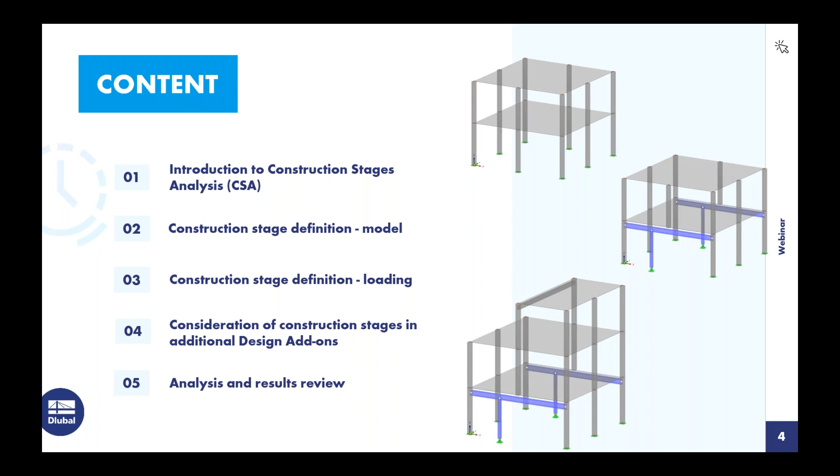So we might be wondering, why would we want to consider stage construction? Well, we know during the construction process that the structure may actually pass through several loading conditions that vary from the completed structure. For example, when we're talking about multi-level story buildings and adding each additional level on top of each other, the previous level is already undergoing deflections and stresses. If we look at the building on the right-hand side, we set up our formwork for the first level, we let the concrete cure, we remove the formwork, and we move on to the second level. That first level is already undergoing some of these deflection stresses from self-weight alone, or maybe some of those additional construction loads. So we'd like to take those into account with stage construction.

Regular simple structures may see very little difference when we compare the stage construction to simply applying the loads to the finished structure. However, when we're talking about multi-story buildings or structures with vertical irregularities, such as interrupted columns or walls, we might actually see a significant result difference between the finished structure versus taking into account each construction stage. The construction stage analysis add-on within RFEM allows us to compare similar structures under different modeling or loading scenarios in a single file, and we also can include nonlinearities with these comparisons. So rather than creating multiple files with the first level completed, then the first level and second level completed, we can consider all of that in a single model.

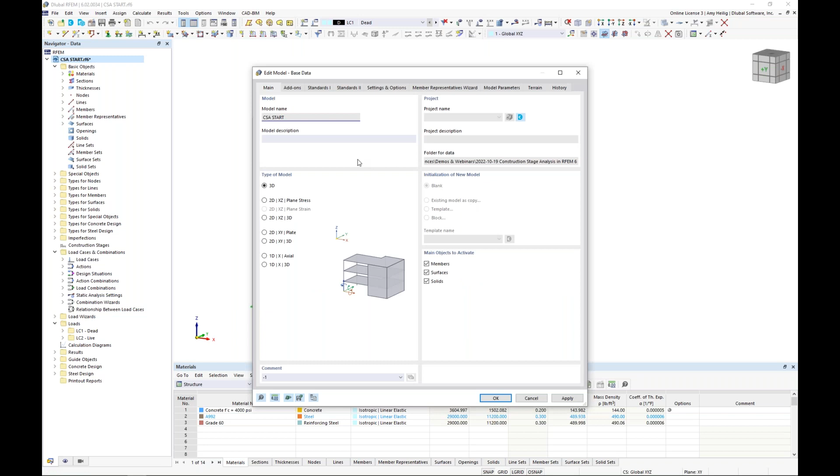Within the navigator to access the base data. This is the same dialog box that would initially pop up when you create a new model as well. Under this second tab, this is where we have all of these optional add-ons.

This would allow you to essentially purchase these add-ons specific to your materials and your design for your particular projects. For today, we're going to be working with the construction stages analysis add-on. You can see that's turned on here, as well as the concrete and steel design add-ons located over here on the right.

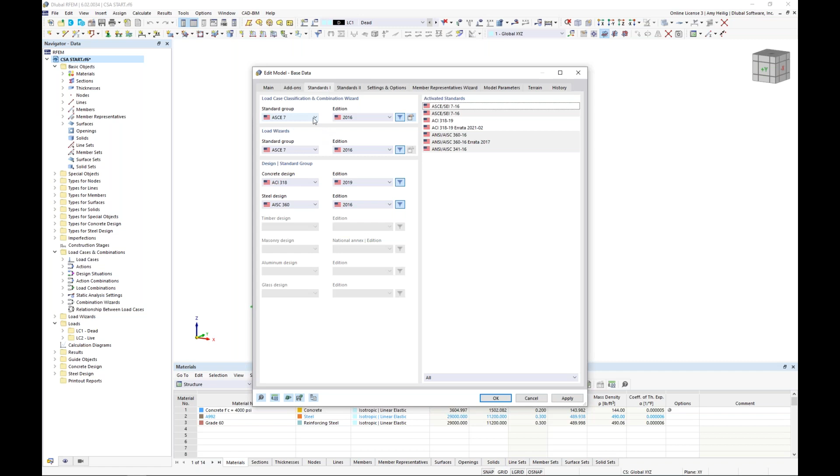Now under the third tab, this is where we set our standards. We want to generate the load combinations according to ASCE 7, which is available within this dropdown. We'll also see here the NBC standard, as well as Eurocode and many other international standards.

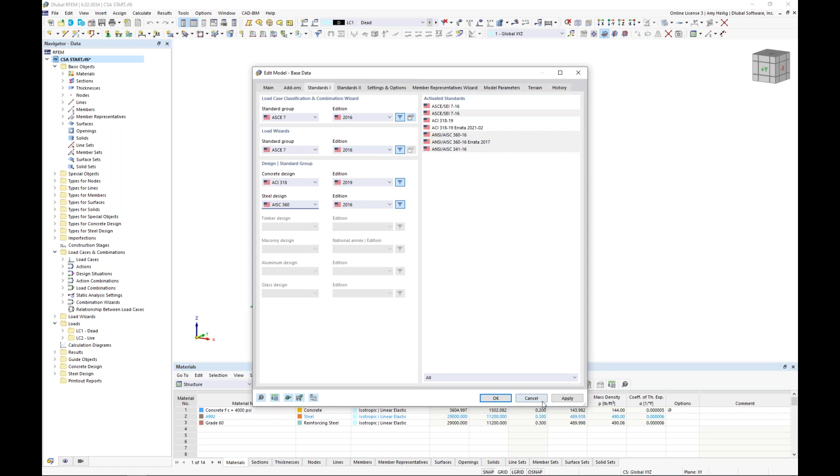As far as the concrete design, we will be using ACI 318, and steel design will be AISC 360. Using this dropdown, we can also see the CSA standards available to us, as well as other international standards. Once we have verified this information under the base data, we'll go back here to review some of the elements that have already been modeled.

If we take a look again at the navigator, we'll see that all of our elements were utilizing 4,000 PSI concrete. Looking at our cross section, all of my columns here, if I double click on one of them, are going to be utilizing this 11-inch by 11-inch square section.

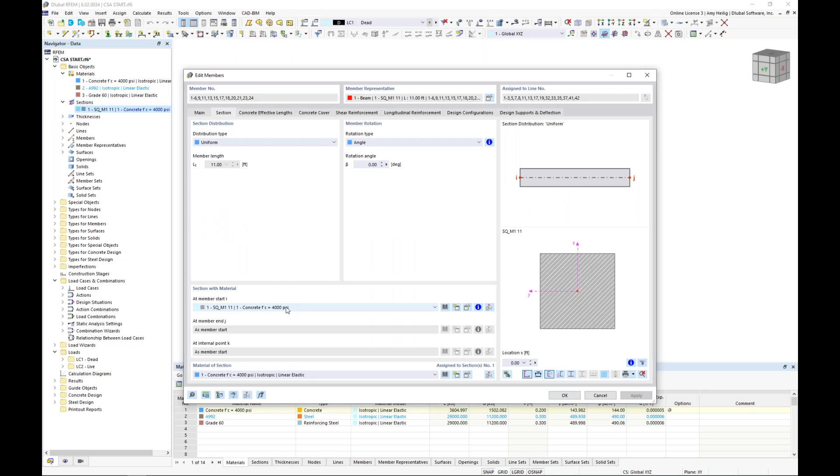Under the second tab, we can see that the concrete material here is set to 4,000 PSI. Back under the main tab, notice that the design properties is checked on here. This simply means that we not only want to use this member for the analysis within the main program RFEM, but we're also going to do the design utilizing that concrete design add-on that we had turned on within our base data.

This gives us all of the available tabs up here to define our reinforcement that will of course be used later on within the strength and serviceability design.

I'm not going to go into too much detail today. There is an additional webinar devoted entirely to concrete design according to the ACI that's available on our website and YouTube channel. So just to quickly cover this, we'll see here that we can specify the concrete cover.

For the shear reinforcement, I have defined number 3s here at 12 inches on center. And then I also have my longitudinal reinforcement, which is going to be 12 number 6s spaced evenly around our cross section.

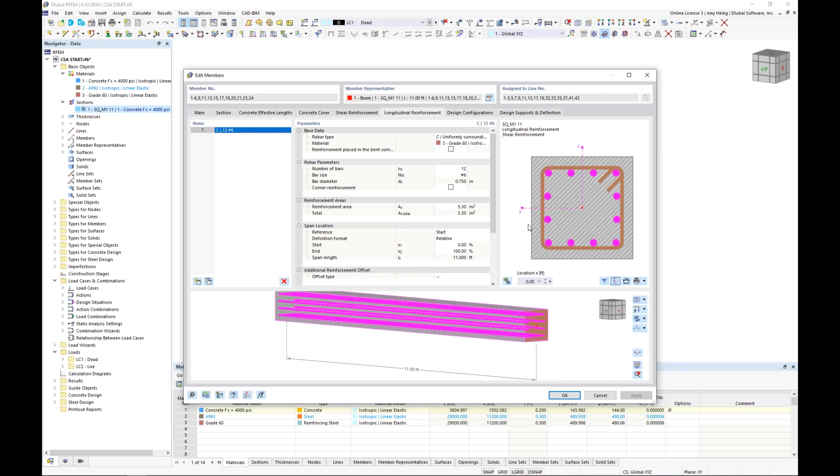This is a very similar workflow here for my surfaces as well. Each of these surfaces was defined here with a thickness of 12 inches. If I double click on one of these surfaces, again we can see that thickness defined here, 12 inches, with the 4,000 PSI concrete.

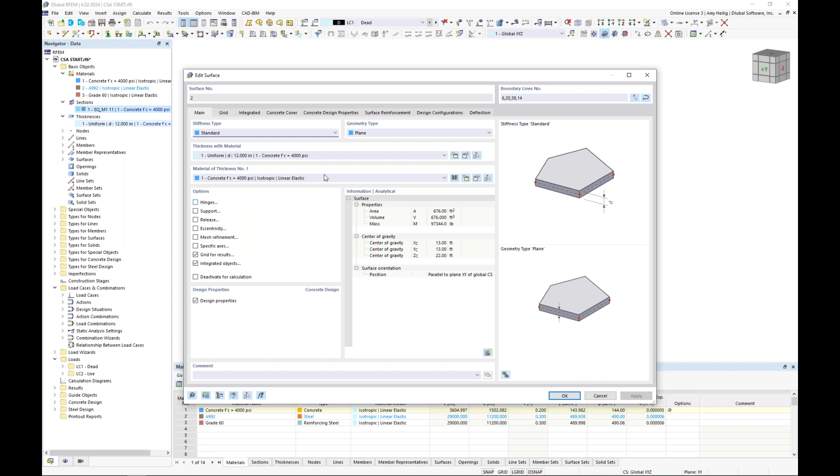Again, I've activated this design property, so we're not only using it for the analysis, but we also want to define our reinforcement for this slab to do the design later on within the concrete design add-on. We see here the concrete cover is defined, as well as the surface reinforcement.

Looking at this surface reinforcement, we can go into the details here. I have specified just simply number 6s at 6 inches on center in both directions, for both the top and the bottom. So very simple application for this concrete slab.

But I also have all of these additional free rectangular reinforcements defined. This just allows me to place some additional reinforcement. You can see number 6s again at 6 inches, where these concrete columns are framing into this slab. So rather than applying to the entire surface, we apply to what we call this free rectangular location.

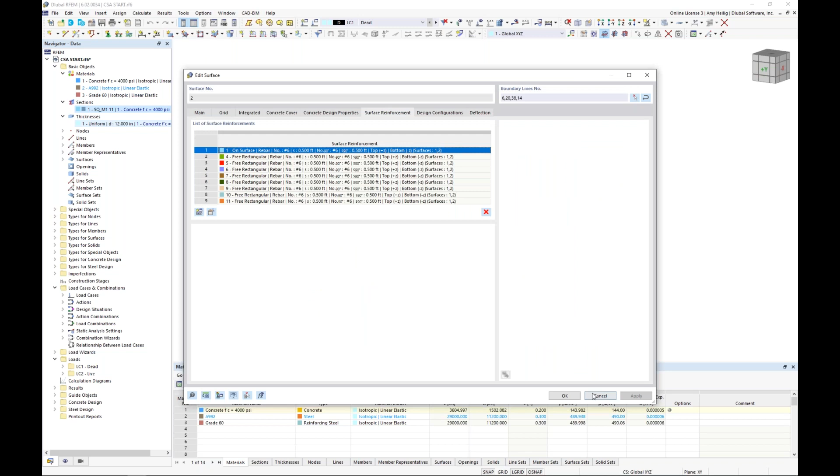Once we have defined all of our reinforcement here, what is actually turned on by default, if we go to our Views tab within our navigator, up here under the Types for Concrete Design, and maybe I turn this into wireframe view, we can actually see the reinforcement here displayed graphically.

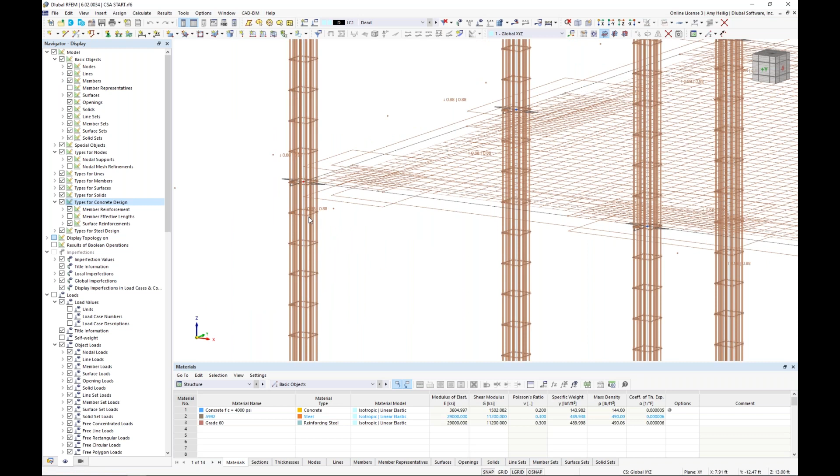So we see our shear and longitudinal reinforcement for our concrete columns. And then, as I mentioned, those slab elements have our number 6s at 6 inches on center, but we also have some additional reinforcement here where those columns are framing into the slab. So we can always turn off this display just to get a little bit of a cleaner look here.

Now additionally, what else I have hidden, which I will turn on now, is the mesh refinements. I've added these FE mesh refinements, you can see by these symbols here at the tops of each of the columns. So we know that within the program, we're likely going to get what we call singularities, where these single line elements, which are essentially our members here, frame into these slab elements at a single FE mesh point. So I'd like to refine the FE mesh here, which you can see I have gone ahead and done with a nodal mesh refinement.

Additionally, what I have defined, which we'll find under the result objects, is what we call surface result adjustments. Now we can see all of those displayed at the tops of our columns. If I double click on one of these, we have the ability to actually average out the internal forces over a set area. Again, this just helps smooth out those singularity areas.

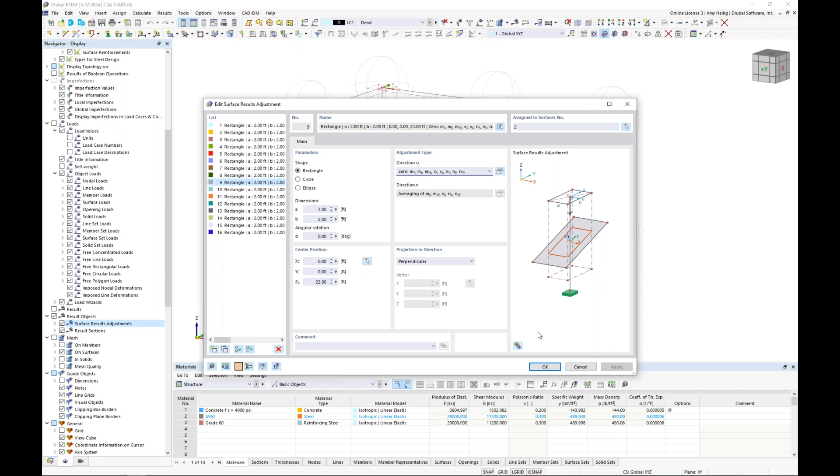For my simple example today, I actually just zeroed out those internal forces at those locations. They're not really a concern for our simple example today, so I went ahead and set that as the definition type here for these surface result adjustments. Again, all of this is just to help with those singularity issues.

So we'll go ahead and turn those off. These will come into play a little bit later on, but for now we will turn this back into the rendered view. So this is my starting structure, just simple two-level concrete elements.

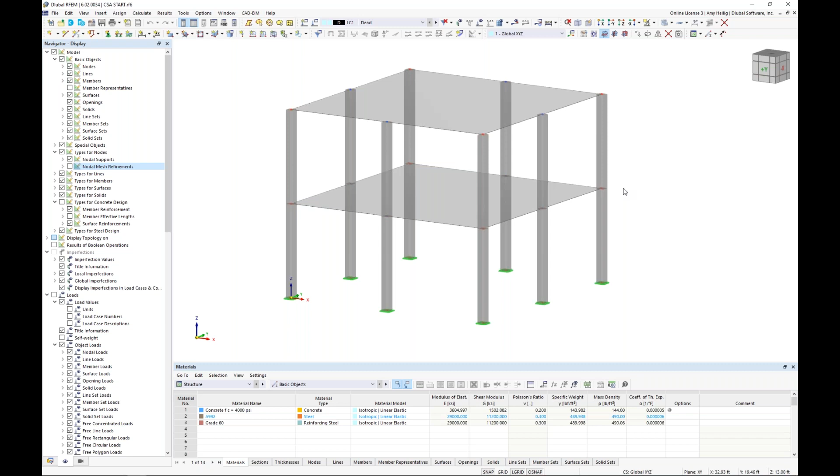Ultimately what I'd like to do is remove these center two columns here on the first floor. Instead of these center two columns of this existing structure, I'm going to add in some steel beams that span between these exterior columns underneath the slab, as well as an additional couple of steel columns that are slightly offset from the center of the structure. So we're going to deactivate these columns and instead add in some steel members, which will describe the workflow here of our staged analysis.

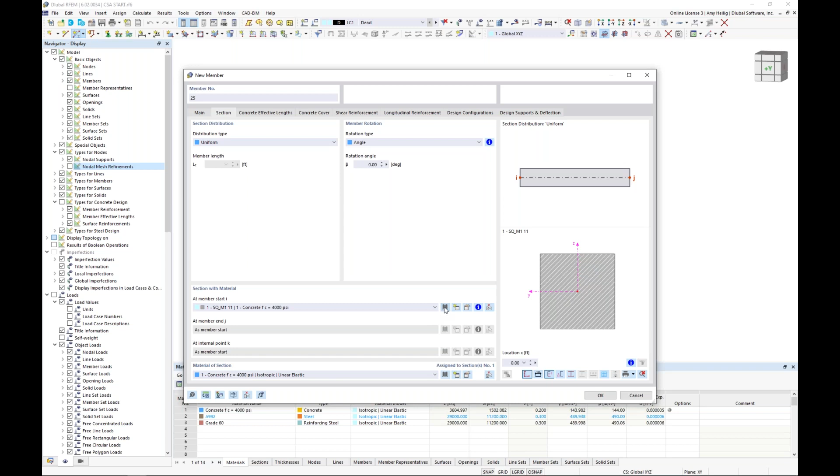Before we define any of these construction stages, we need to ensure that we have everything completely modeled in RFEM. So we will begin by drawing a new member here, and up in my quick toolbar, I can draw a new single member. Now, under the section tab, I want to define a new cross-section by visiting my cross-section library.

We can see all of the various sections we have available to us, including the parametric sections, where we simply input the dimensions and the cross-section properties are calculated automatically. Now, alternatively, we can view these standardized sections.

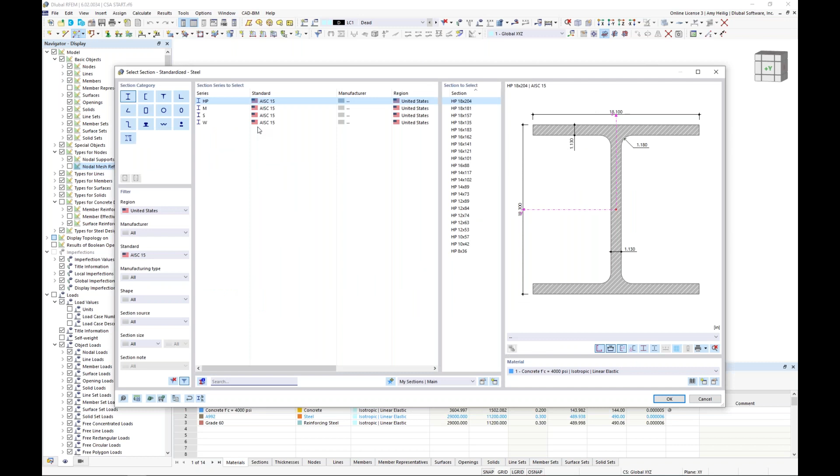For example, we can activate our I-beams. We can use our filters on the left to filter to the United States and to the AISC 15, and I want my beam section to be a W14 by 82. So I scroll down here to my list and select the 14 by 82.

Of course, we don't want this to be a concrete material, so what we'd want to do is activate our material library for this particular section. Once we launch our material library, again we can use our filters on the left to filter to the material type steel, and then set the standard to AISC 360, and we'll see steel A992.

Now for me, I already have this steel material defined within this model, so rather than redefining a new material every time, I can just select it here within my dropdown. So I select material number 2, A992, and our beam has now been defined with the correct cross-section as well as the material properties.

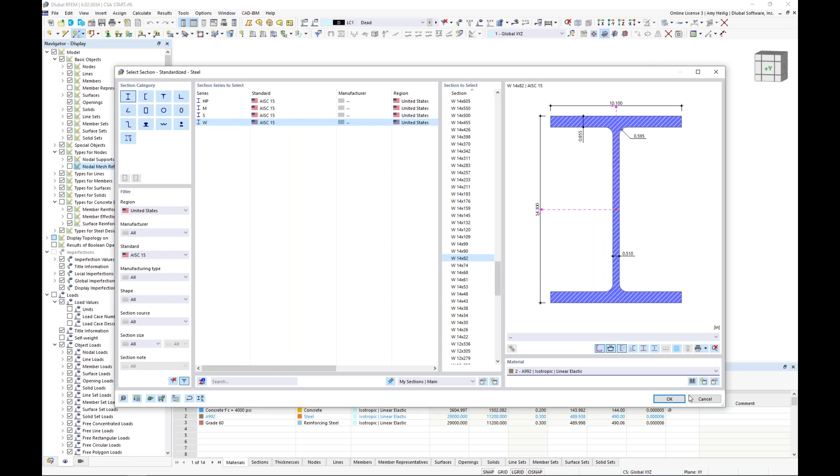In addition to defining the cross-section and material, notice that the design properties is turned on here as well, but we're no longer referencing the concrete design add-on we activated under the base data; we're now referencing the steel design add-on. Before I draw these members, I also want to activate a couple other options, including hinges and eccentricities.

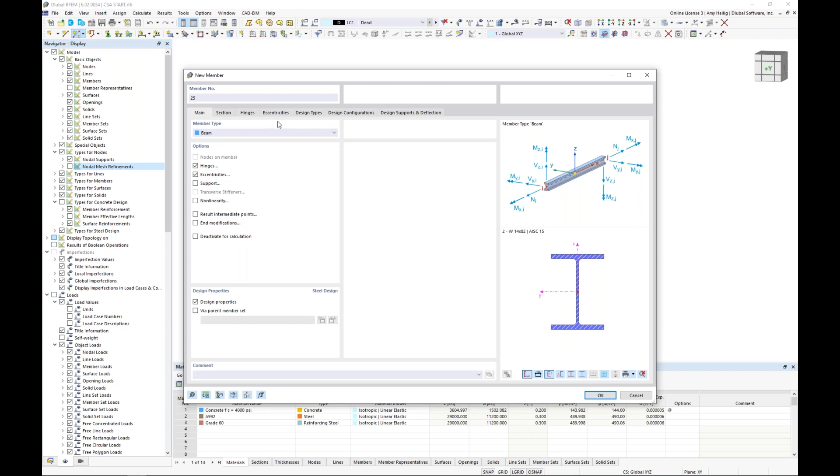Notice we have two additional tabs here up at the top. Remember that everything within Rfem is considered fully fixed, so if we want to release a moment, for example, at the ends of the member, we need to define a new member hinge. We do so by activating the hinges and creating this new definition type.

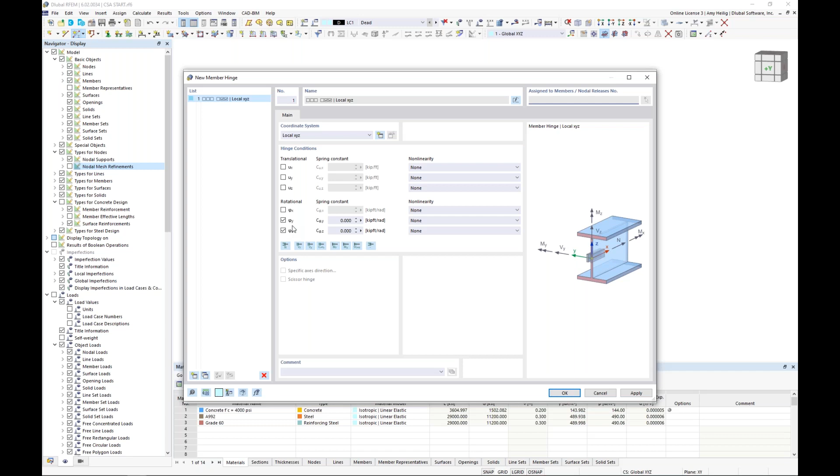The program is automatically going to assume that I'd like to release the moments based on the local Y and local Z axes of the member. So this is a member end moment release. I click OK, and now I've applied that to the member start. Rather than redefining for the member end, I can simply select it here from my dropdown. So we'll go ahead and release the moment at either end of this particular section.

Now the eccentricities is a very similar workflow. We want to define a new member eccentricity here, and I'm going to use this option within my dropdown relative to section.

I will tell the program to take the topmost point of my cross section, and offset it from an additional object that already exists within my model. I'm going to select the option surface, then graphically select surface number 1, and drop this beam member down below the bottommost point of this surface.

The advantage of using this option relative to section is that if I make any changes to my cross section size, or any changes to the thickness of my surface, this eccentricity will automatically update. I don't have to come back in here and adjust it manually.

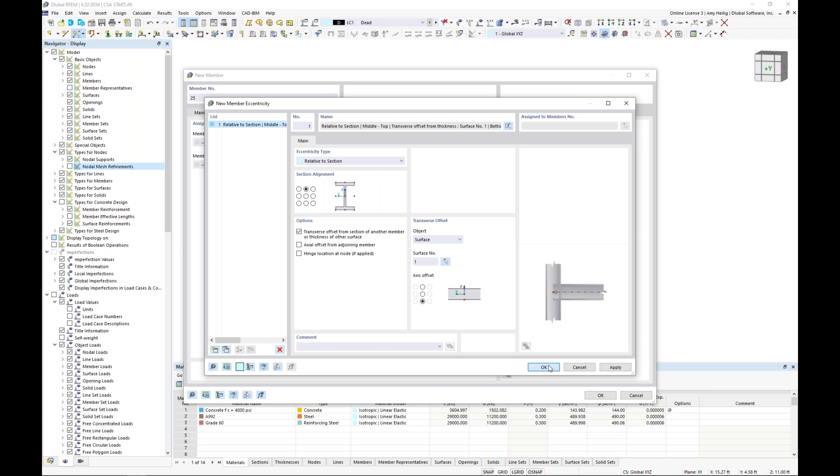We applied that eccentricity definition to the member start, and we also want to apply it to the member end. Now that we have defined the hinges and eccentricities, I click OK.

I will snap from the right-hand column to the left-hand column at the front of the structure, and also do the same at the back of the structure. Now we can see this steel beam drop down below the surface. Obviously, it's intersecting these concrete columns, but that's completely fine. We'll make these changes later on with the construction stages so that both of these do not exist together.

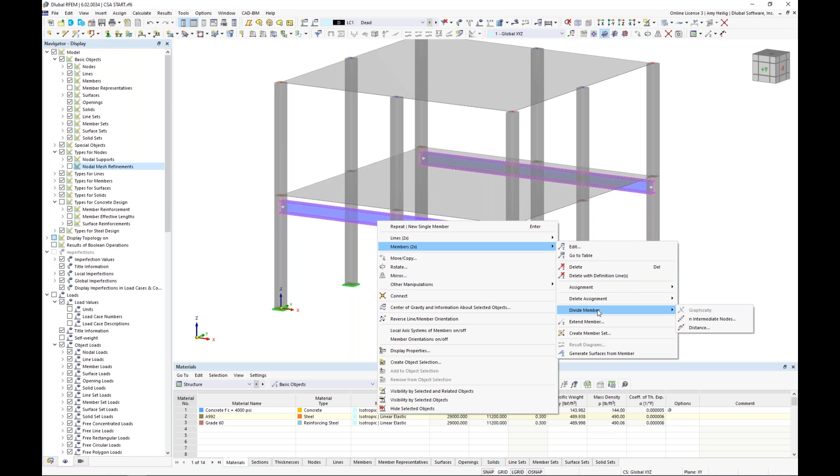I'm going to hold down my control key and select both of these members. I want to right click, and under the member option, divide the member by a set distance. Here is where I want to add a node along the member 8 feet from the member end. But instead of actually dividing the member, I'm going to turn on this checkbox to create the node along the length of the member without dividing it.

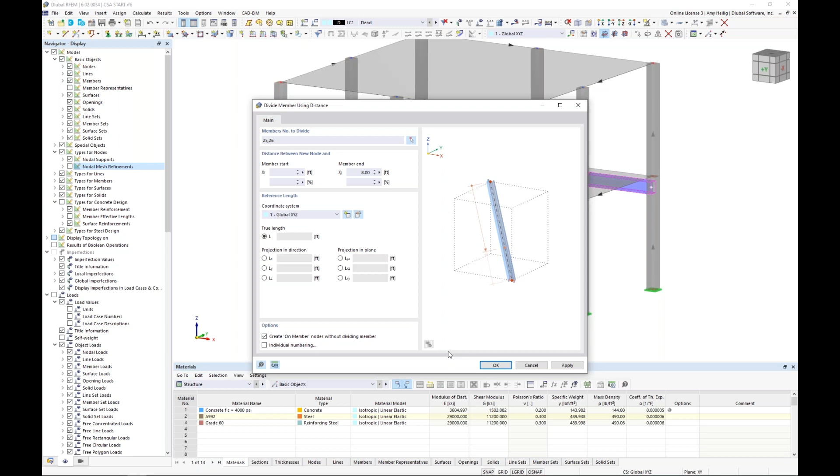When I click OK and turn this into wireframe view, you'll see that this is still one continuous member, but we now have a couple of nodes defined along the member length. These nodes are special in the sense that they're of the type on member, and the program automatically detects which member it should be integrated with.

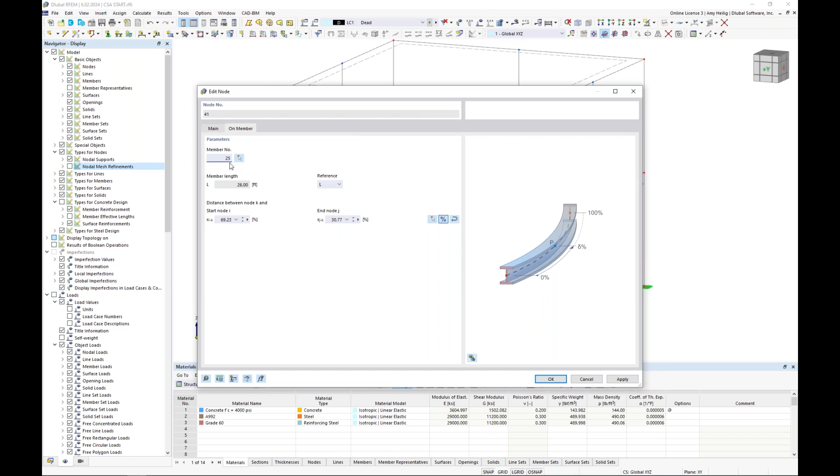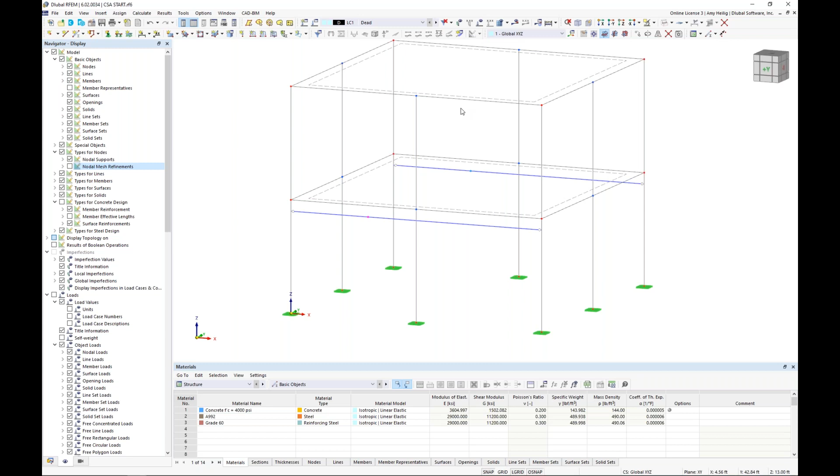This allows me to draw in my steel columns that will frame into these steel beams. I'll begin by adjusting my drawing work grid, which we can turn on at the bottom of the page, and we will also adjust the plane. And I will create a new cross section yet again.

The member type is set to beam. The section will be defined once again from my section library. In these standardized sections, I want to select a W8 by 35. Remember, I already have my A992 material defined within the model, so I can select that here.

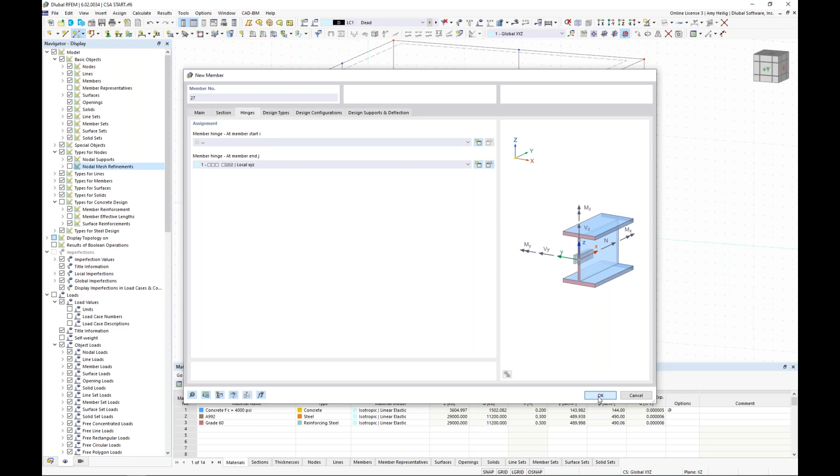I click OK. One thing we'd like to add here is also a hinge definition. Under my hinges tab, remember I have already defined that moment release, so I can select it from my dropdown as well, where I can release the moment at the member end. I click OK, and then snap from the bottom of the structure up to that node that was created. I can right click to exit this dialog box.

If we take this element, we can highlight it, hold down our control key, and drag and drop to the rear of the structure to create that additional column.

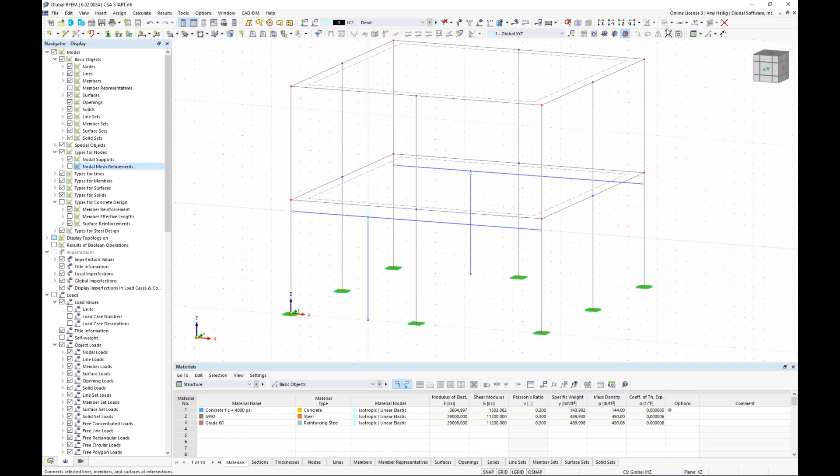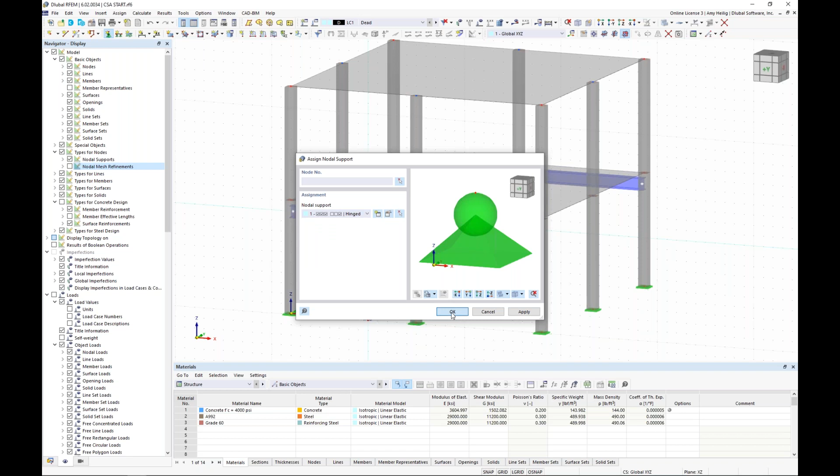Now that these two columns have been generated, there's a few additional things to consider. Number one, we need to add some supports to the bottom, so we'll add in a new nodal support. We're just going to use one of the default definition types here, hinged. I can click at the bottom of these steel columns to add in that nodal support.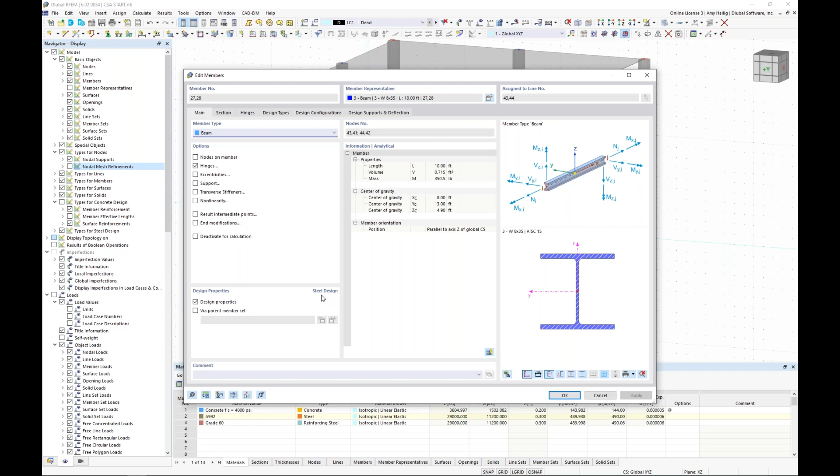The second topic is holding down my control key to select both of these columns. Remember, we are going to design these members utilizing the Steel Design add-on at the end of this example. But one thing required if we want to do so is we need to define information like the unbraced lengths, which we do under the design types effective lengths. I have an additional webinar devoted entirely to steel design according to the AISC that goes into much more detail about the unbraced lengths or effective lengths definition type.

We'll quickly add in these intermediate supports that are going to be applied for flexural buckling, torsional buckling, and lateral torsional buckling. Under this second tab, the default option is to add in this intermediate support at the member start and member end.

And now my unbraced lengths for my stability design will default to the full member length. So when I click OK, you can now see that we go back into the model and the unbraced lengths have now been defined here for these particular elements.

Now we need to do the exact same thing here for our beam elements. So we'll select both of these elements, and under the design types we define a new effective length. But this time I want the program to detect these intermediate nodes, in particular where this steel column frames up into the steel beam, where I can add an intermediate support in the vertical direction. So now the program will consider this with the effective lengths, or unbraced lengths, for our stability design.

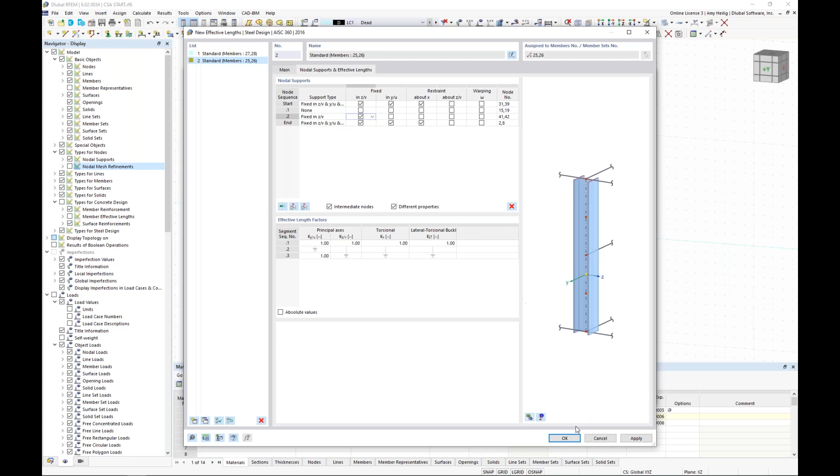Okay, so that takes care of the unbraced lengths, which will again come into play a little bit later on for our actual steel design according to the AISC.

The final topic here related to this first story is that currently this slab element is entirely connected to this steel beam. So full force transmission, full moment transmission between these two elements.

Now, if we would like to release some of those degrees of freedom, what we can do is consider what we call a new line hinge. So under the option here, types for lines, we expand this folder and we see a line hinge where we can right click to create a new definition type.

With this line hinge, I'm actually going to release all degrees of freedom: 3 in translation based on the local X, Y, and Z axes, and 1 in rotation. Keep in mind that these are based on the local axes of the line element itself, not the local axes of the surface or of the member. Each line has its own X, Y, and Z axes.

But rather than keeping these fully released, we want to add in a nonlinearity. This nonlinearity will allow the slab to bear down on the beam when we have downward deflection. So if we have a negative shear value in the local Z direction, we should see full fixity. But if we have uplift, then that relationship between the slab and the beam will be released. So we're applying this nonlinear behavior to this line hinge.

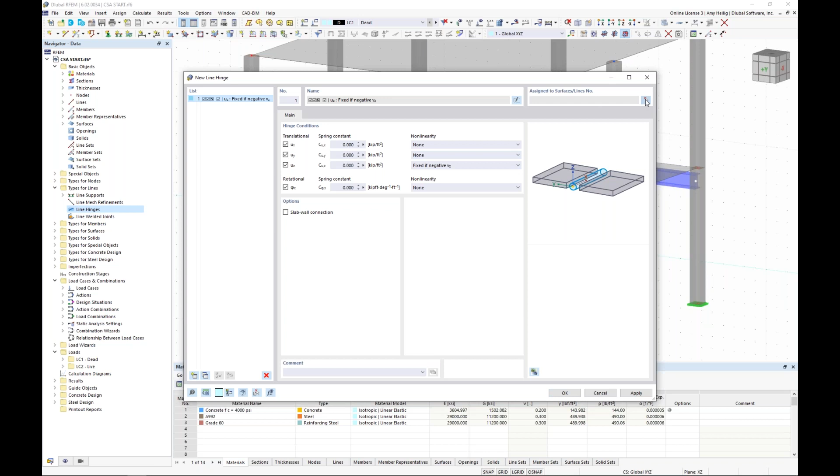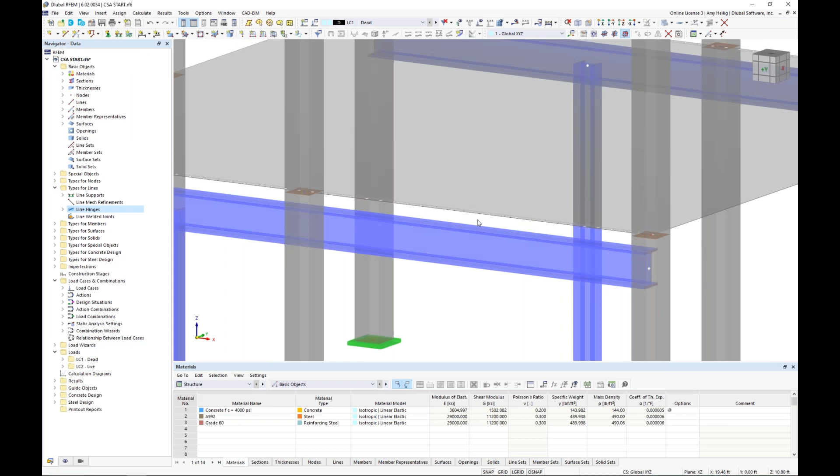Once we have the definition type presented here, we want to apply it to the model. We do so by first selecting the surface we want to apply the line hinge to. Then we select the lines, choosing the front line number 12 concurrently with the back line number 18. We click OK, we click OK. Zooming in, we see a very small symbol for that line hinge definition.

Again, this will also come into play with our construction stages. So we're now complete with this first story.

The final thing I want to do with this model is add in a third story, a partial third story. But before we do that, if you remember, I'm going to go back to the nodal mesh refinements. I'm going to turn back on my concrete reinforcement and also those surface result adjustments.

I'm doing so because when they're graphically displayed here, this will ensure that when I copy all of these elements to the third story, all of these details are also copied. So we can go ahead and highlight this top story here, including the reinforcements, mesh refinements, and so on.

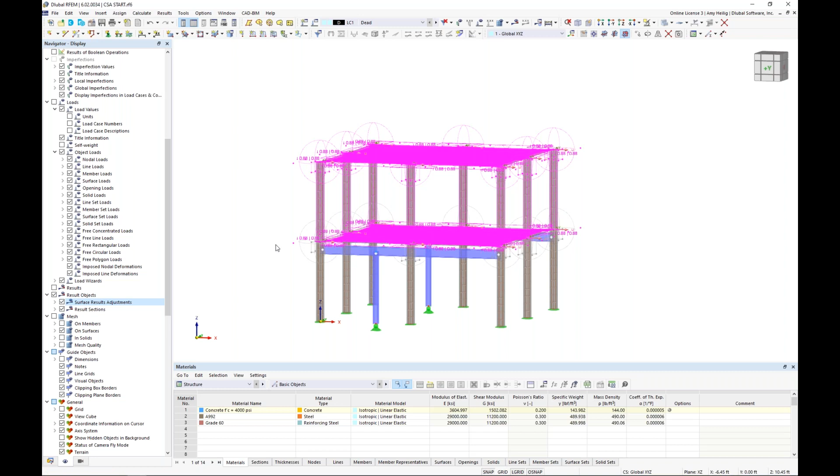Now, normally we could use this simple drag and drop copy that I showed you with my steel columns, but I want to take advantage here of the Move Copy tool for a specific reason.

So we're going to create a copy here of that second story, and I can either type in my displacement vector or use this measurement tool. I can snap to the bottom of that second story up to the top, and we see the program automatically detects this is 11 feet in the Z direction.

But under the numbering and options, I have the ability to not only copy all of the elements, but also the loading. So I have some existing loading on the structure for dead load and live load, which we'll visit in just a few minutes.

By activating this checkbox, all of those loads will also be copied. So I click OK, and what we should see here is the addition of this third story.

Now for this third story, I actually want it to only be a partial third story. So we'll need to clean this up slightly, and I can do so by holding down my control key to select the top nodes of these columns. I hit delete on my keyboard, and now all of those columns are gone.

I'm also going to hold down my control key to select my columns as well as the nodal point at the tops of the columns. I'm going to use my Move Copy tool again, but instead of creating a copy, we'll uncheck this and use my displacement vector. I'll select from the left-hand side of the structure because I want to move those columns to the center of the structure, so a displacement vector of 13 feet.

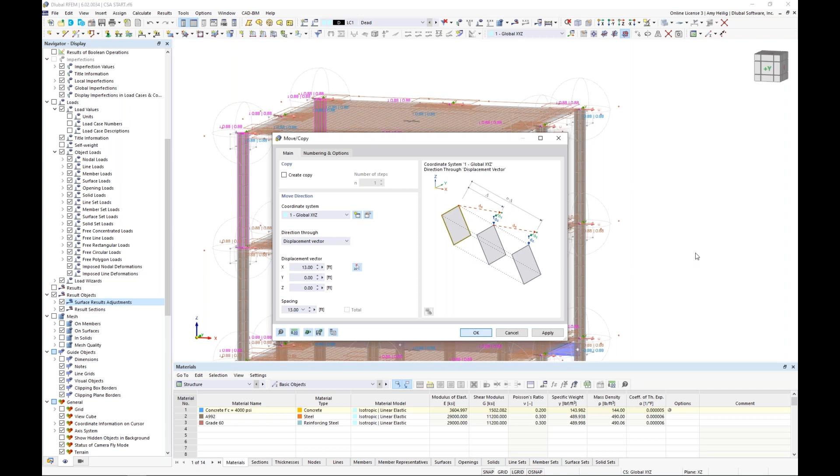So now when I click OK, what we should see is that partial third story. Notice that all of my reinforcement was copied as well, and it's somewhat adjusted as I essentially shrunk down this third story to a partial third story rather than the entire area. Back under my navigator, we can see the types for concrete design and all of my surface reinforcement listed. The program was intelligent enough to go ahead and apply the same reinforcement to that third story.

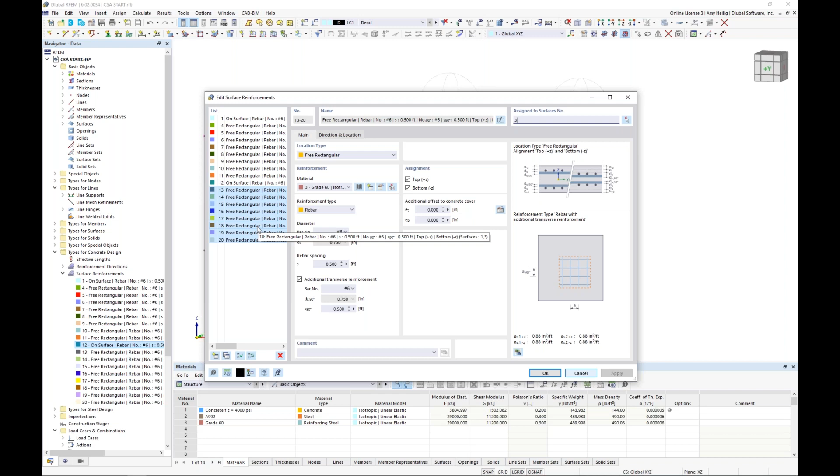We see our number 6 bar is at 6 inches on center. We also see our free rectangular reinforcement that was defined for that third story. So we can make modifications here if we don't need such close spacing, or we want to make modifications to our bar diameter, we can do so. But for this example, I'll leave everything as we see here.

So all of this information over here that exists, we can simply highlight it and hit delete on our keyboard. Essentially the modeling is now complete for this structure. Again, before we define those construction stages, we need to ensure that everything is fully modeled within RFEM itself.

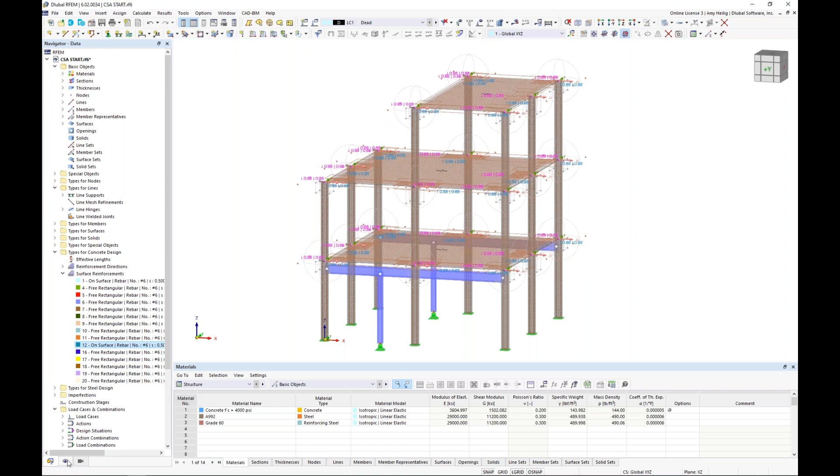So I want to go ahead and turn off the nodal mesh refinements. I'll turn off my reinforcement and those surface result adjustments just for a cleaner look. So now we're finally ready to begin with our construction stage definition.

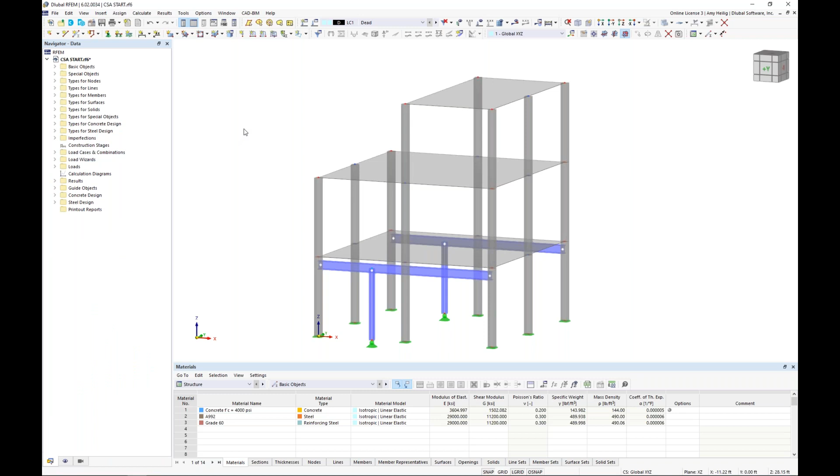Back in my navigator, we have a nice feature here: if I right click, I can actually collapse all of these folders. And there's one more thing I wanted to do that I had forgotten before we define our construction stages — maybe we wanted to apply a quick rib element that spans between these columns. Just to introduce you to this rib type, we can draw in a new single member.

We can see here the member type would actually be set to rib. Now, what's special about a rib is we can integrate it with the slab, so those internal forces will now include the internal forces from the slab for some effective width that we define. We also can turn on the design properties to design this as a T-beam, including the reinforcement in the concrete design add-on. For today, I'm not so interested in designing it.

So what I can do is simply turn this off. I only want to consider it for the analysis. Notice all my tabs here to define my reinforcement are now gone.

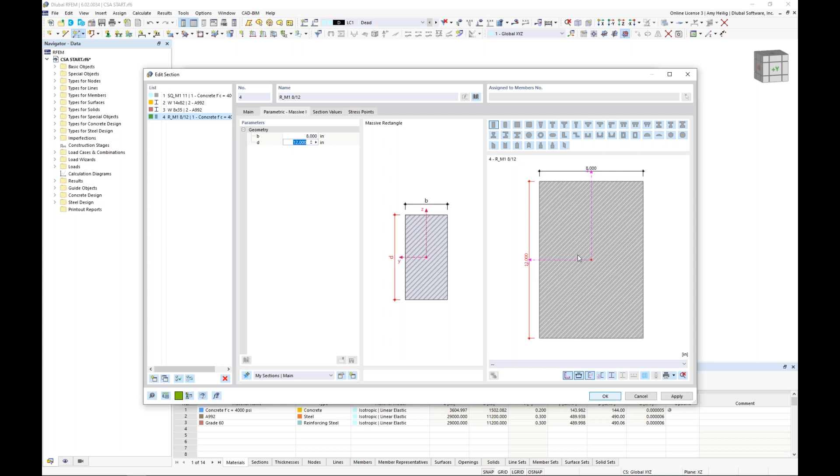So under the section, we will create a new cross-section type for the last time, and we'll choose this massive rectangular section, where I can quickly choose under the second tab my dimensions, and I'll type in directly 8 by 12 inches for this rib element. 4,000 PSI concrete is already defined, and under this second tab we want to drop this down below the negative Z direction of the surface element itself.

So when we click OK, we can actually draw in this rib element from right to left. Again, internally we are including the effective width of this element. If we revisit the rib section, we can actually see that drawn here graphically.

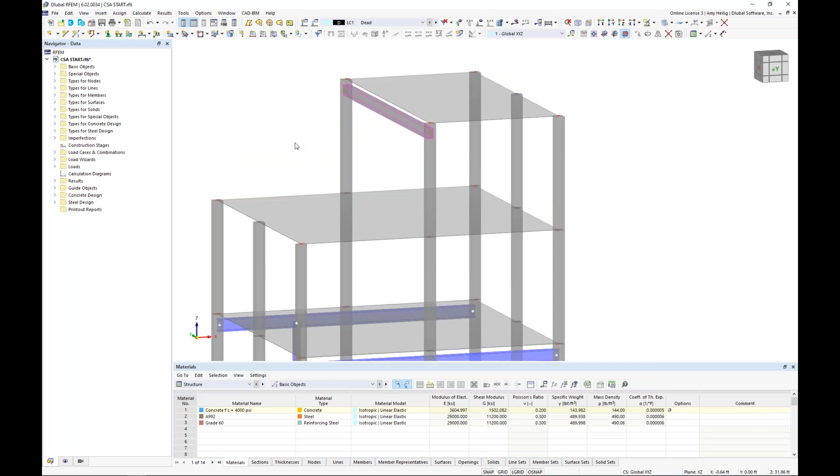Okay, so now we are done with all of the modeling within the RFEM program. So we can move on to the construction stages. We've collapsed all of these folders just to make this a little more visible. You'll see here the construction stages option. Now this is only available because we activated that construction stages analysis add-on under our base data.

We will start by right-clicking to create a new construction stage. The program defaults to construction stage number 1 and gives it the name Start. We can override that name if we'd like.

We need to tell the program which elements are active for this first stage, beginning with our members, surfaces, and nodal supports, which gives us additional tabs. I wanted to point out this option grayed out for time-dependent analysis is still in development. Eventually we will link construction stage analysis to our add-on for time-dependent analysis to consider topics like creep and shrinkage, but for now it's still in development.

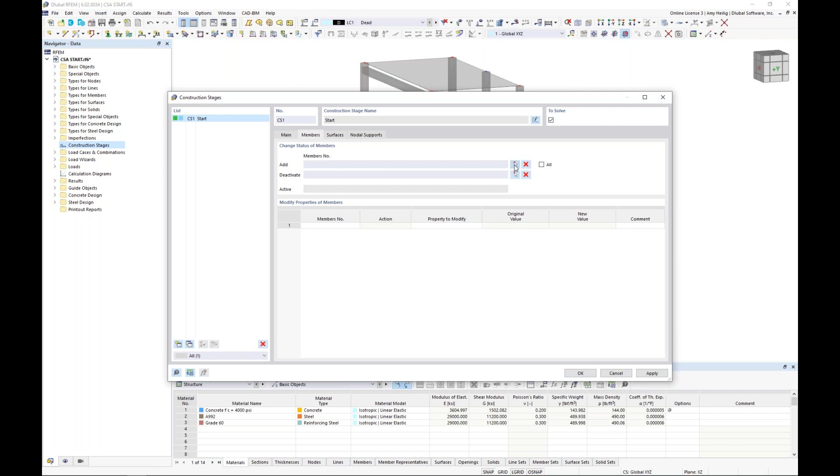Under these additional tabs, we want to add in the initial elements for that first stage, starting with our concrete columns. At this first level, I'll select all of my concrete columns, making sure I'm not selecting any of the steel elements yet.

For my second floor, I select all the concrete columns here as well and click OK. For my surfaces, I want to activate surface number 1 and surface number 2, and click OK. Finally, for nodal supports, I activate the supports at the base of these concrete columns, not selecting the supports of the steel elements, and click OK. My first stage definition is complete.

I'd like to create my second stage definition in the lower left corner, number 2. I again have the ability to override the name, so I'll rename this one Add Steel Members.

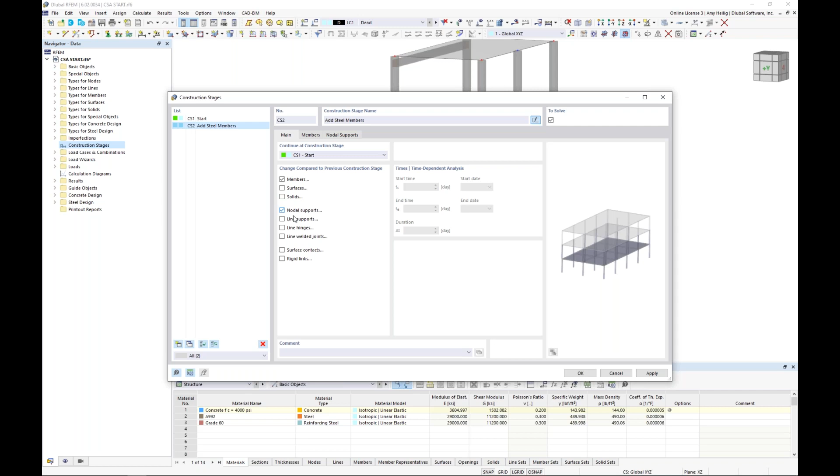I want to activate my members here. I'm not making any changes to my surfaces, so we can leave this active, but for simplicity we can turn it off since we're making no changes. We can select the nodal supports, and remember we also added those nonlinear line hinges, so we want to activate this as well.

Under the members, this is where we deactivate the center concrete columns, so I graphically select members number 9 and 13. At the same time, I'll activate all of my steel members, graphically selecting all 4 of these steel members. This entire process is completed within this second construction stage.

We could have certainly separated these options into two stages—perhaps deactivating the concrete columns first in one stage, then an additional stage to add the steel beams. It depends on your construction stage workflow for your particular project, but for me, I define these all in one stage so it happens simultaneously.

Now for the nodal supports, we need to add the pin nodal supports at the base of the steel columns, so we select those. I don't need to worry about deactivating the supports at the bottom of the concrete columns—in fact the program won't even let me, because it says these members no longer exist, so those supports are no longer active either.

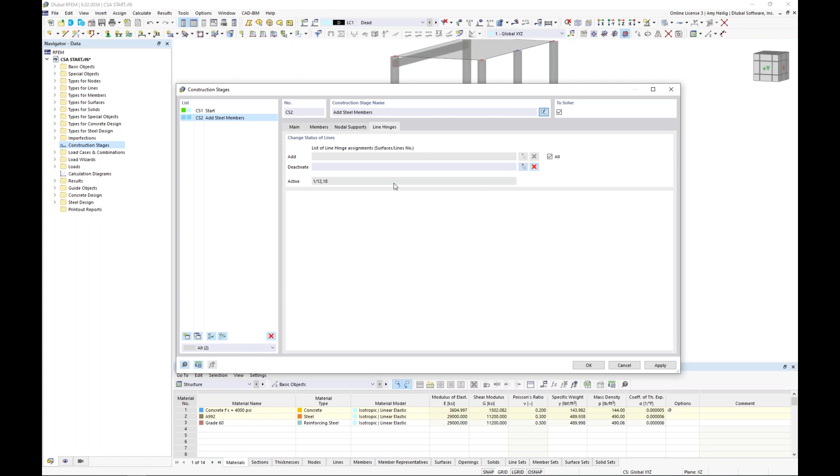Finally, we also have the line hinges. I can graphically select the line hinges, or alternatively just hit this all checkbox. We only have one line hinge definition in the entire model, so this all option will activate all line hinges, completing our second construction stage.

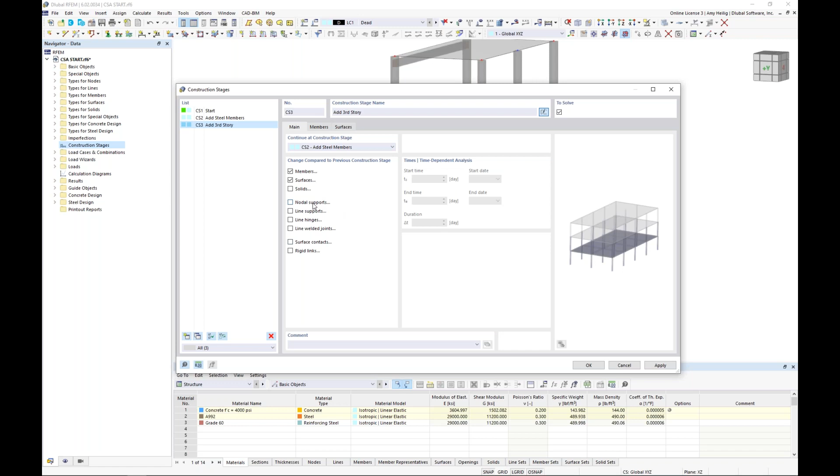For the final stage, we again go to the lower left corner and rename this one Add Third Story. The options to activate: we leave on members, and we also activate surfaces, but everything else can be unchecked. For our members, we add in all of our concrete columns and even that rib element at that third story.

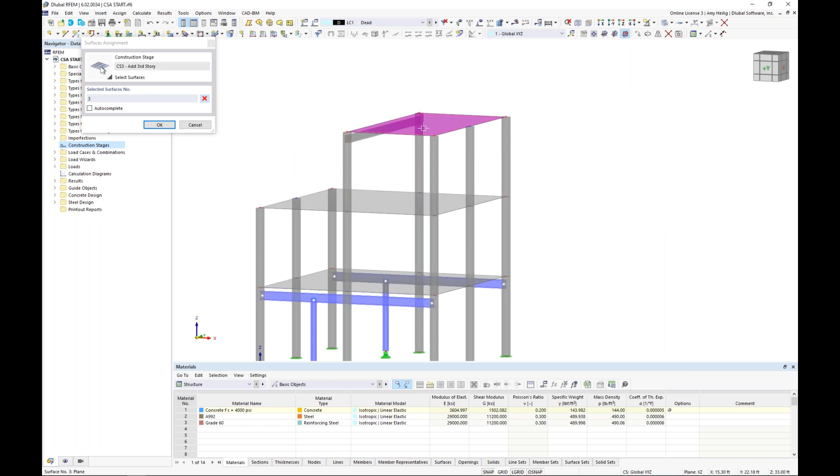I click OK, and for my surfaces I can either type in surface number 3 directly or graphically select it, summing up my construction stage definitions. Once I'm done defining all 3 stages, I click OK, and at our drop-down we see each construction stage presented to us so we can graphically see what's going on.

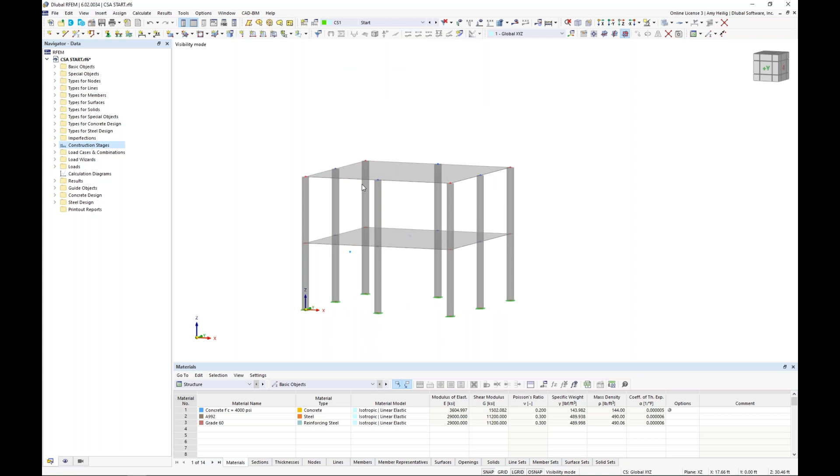So here's stage number 1. Here is stage number 2. Notice those 2 concrete columns are gone. We've added in our steel elements. And finally, we have the addition of the third story. So this will sum up the construction stage definition from the modeling point of view.

But now we need to move on to the loading. How can we integrate the load cases as well as combinations to these various construction stages?

I want to point out first that I have already applied 2 very simple load cases to our model today. If I activate my dead load and turn on the display of these loads, these are simple surface loads applied to all 3 levels. Remember, when we copied this third level, the loads were also copied.

So just a simple 35 pounds per square foot for our dead load. Same concept for our live loads, slightly different magnitude here of 40 pounds per square foot applied at each level. Now, of course, for a project in real life, we'd probably want to add in wind loads, snow loads, whatever else it may be. But for this simple example, we only have these dead and live loads.

So I'm going to access my load cases and combinations dialog box, and we see here these 2 load cases listed. Dead load, which notice self-weight is automatically turned on here with the action category set to dead load directly from the ASCE 7. The second load case is live load, again with the action category set to live.

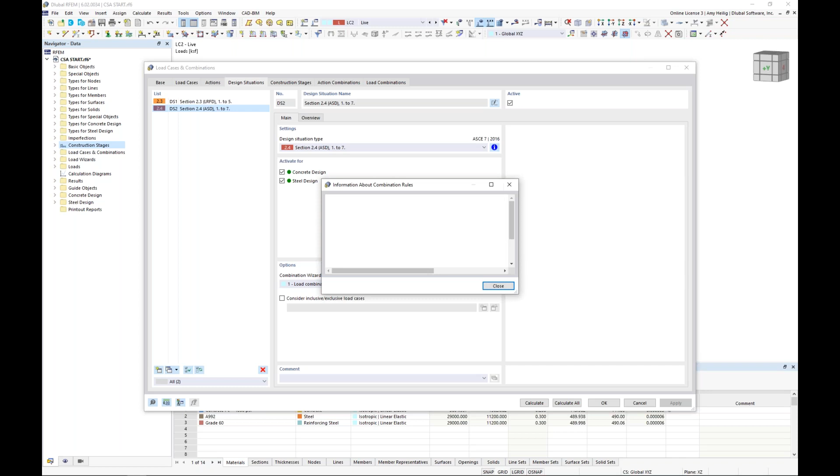The design situations essentially encompass all of our load combinations. So we have two of them here. We have our LRFD design situations from the ASCE 7. This is going to be all of our factored load combinations, again, directly from the standard. And we have a second design situation for ASD, or this is going to be our unfactored load combinations. Again, we can just reference here to see exactly what they look like according to the standard.

Now, if we take a look at the load combinations tab, here are my individual load combinations strictly for those dead and live loads, since I don't have any additional load cases defined. And I have two factored load combinations that belong to that LRFD design situation shown here in orange. And I have two unfactored load combinations that belong to my ASD design situation.

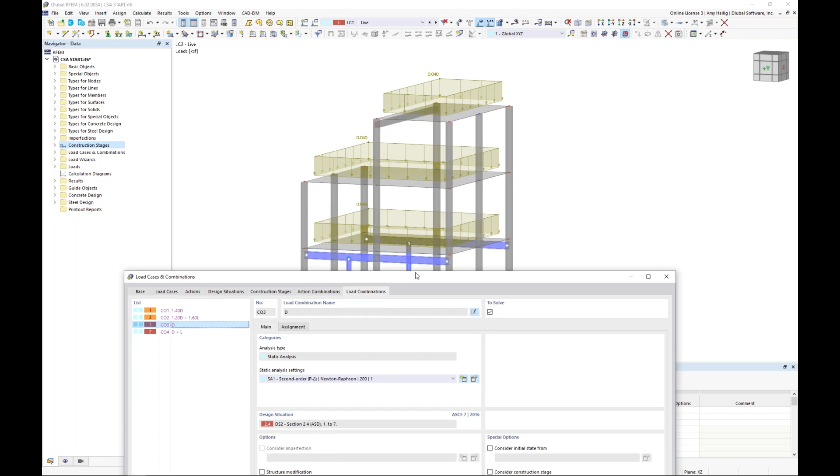Now, if I was applying the conventional method here of applying all of these dead loads and live loads to my structure, again on the finished structure with the third story and the steel members, then we would just go ahead and move on with the calculation utilizing these load combinations. But currently, they are not referencing those various construction stages.

So what we want to do here is go to the construction stages tab. And here we see our 3 stages that we have already defined, which are automatically brought into this dialog box. Notice that each one of these stages will reference the previous stage. So it says continue at construction stage number 1 for number 2. And then, of course, if we look at our third stage, it's referencing number 2.

A couple other options to point out here. The construction stage analysis is done according to the load combinations. This is grayed out. The reason why is because this is also in development — in the future we plan to add in the option for load cases and a result combination using linear superposition. This would be for linear structures where we don't necessarily have to incorporate the construction stages into each load combination, but rather we superimpose the results on the finished structure utilizing a result combination instead.

So this could be a really powerful increased performance for multi-level story structures, maybe with hundreds of load combinations, making this very efficient. But for now, it's still in development, so that's why this option is grayed out.

Now, the static analysis setting is really important. You can see my construction stages right now are set to second order. If I go into detail settings, I could change this to first order, second order, or third order. We want to ensure that these static analysis settings are either equal to or higher than what we're using in our load combinations and design situation.

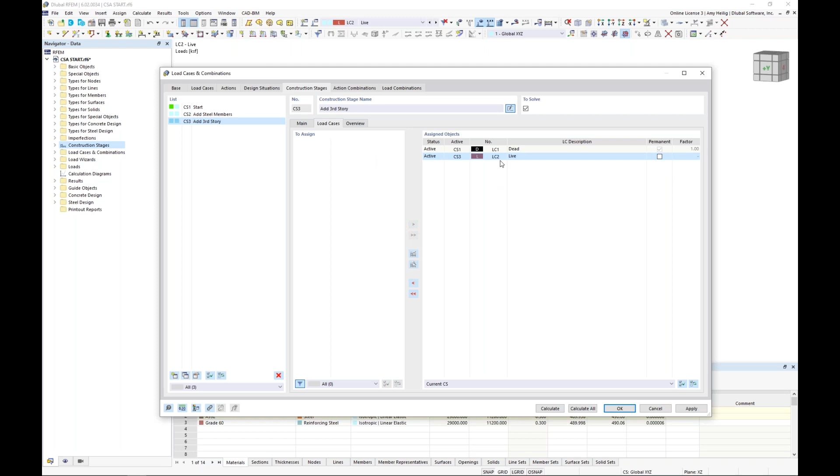And finally, we have our third construction stage where we've added in that third story, and dead load is already automatically included - it has to be because of that permanent checkbox - but I'm going to factor back in my live load here. So now we have allocated each one of these load cases to the construction stage.

The final thing to do is tell the program to create the combinations utilizing the construction stages as well as the combination wizard. So I turn on this checkbox and go into detail settings, and I'm going to tell the program don't consider the normal load combinations we previously saw - rather, just consider the construction stages only. I'm not concerned with the final structure and applying those loads with the conventional method.

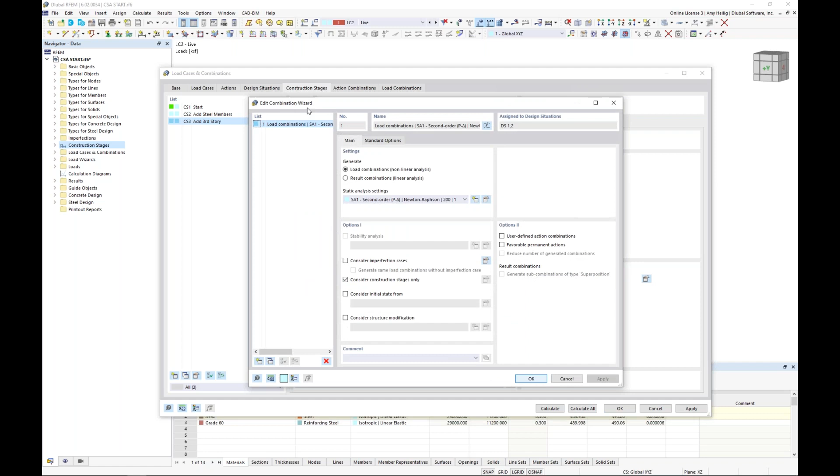And I click OK, and then we can just simply turn on this checkbox for the rest of these stages. This checkbox is already turned on if we go into the detail settings, because it's part of this combination wizard definition type number 1 here.

So now that we have selected this checkbox, we should see slightly different load combinations shown under this last tab, and sure enough we do. Notice that we have our factored load combinations, part of that first design situation, but they are now considering the construction stages.

So for stage number 1, we have 1.4 dead load. For combination number 2, still construction stage number 1, we are now also considering the live load, so dead load plus live load. If I look at construction stage number 2, I'm only considering the dead load, so 1.4 dead - remember, live load I did not incorporate into this particular stage.

Notice that over here on the right-hand side, the program says for the initial state, I'm going to consider the previous construction stage. You can see our load combination number 1. So it will take into consideration those strains, those stresses that the structure is already undergoing from construction stage number 1, and apply this to construction stage number 2 for this particular load combination. Same exact concept here for construction stage number 3. We can see the initial state is set here, but we're also factoring back in our live load.

So we see 2 additional load combinations here. Same exact concept for my unfactored load combinations that are a part of this second design situation here, my ASD design situation. Now we see a couple of grayed out load cases down here at the bottom, and we might be wondering what are those for? And they're not a part of any design situation.

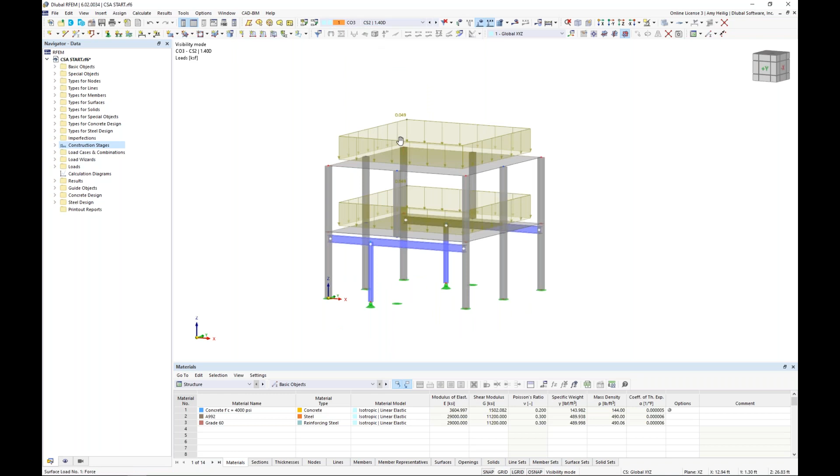Here's load combination number 1 with my dead load. Here's dead plus live. Here's my second construction stage, again only with the dead load. And then I move on to the addition of that third story with the dead load consideration and then dead plus live. So the program's automatically combining all of these together.

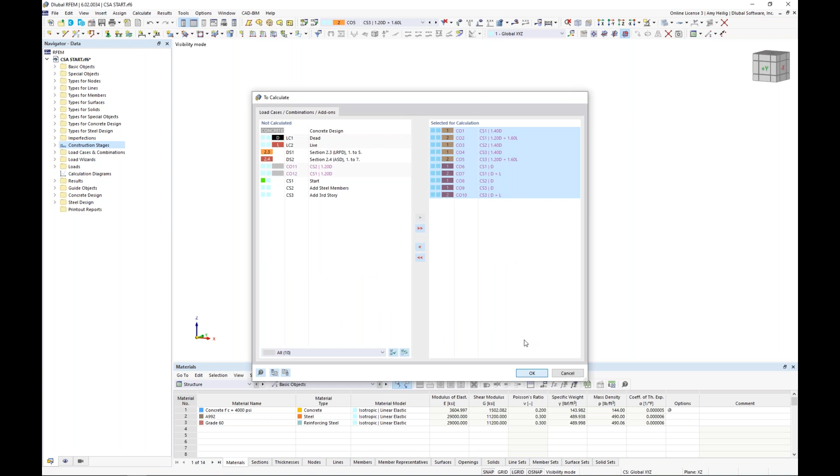So under calculate, we go to the option to calculate, and I am going to select here only my valid load combinations to move over to the right-hand side. When I click OK, the program is going to generate the FE mesh, and then new within RFEM 6 is this multi-core processor where we can solve load combinations simultaneously for a little bit quicker analysis.

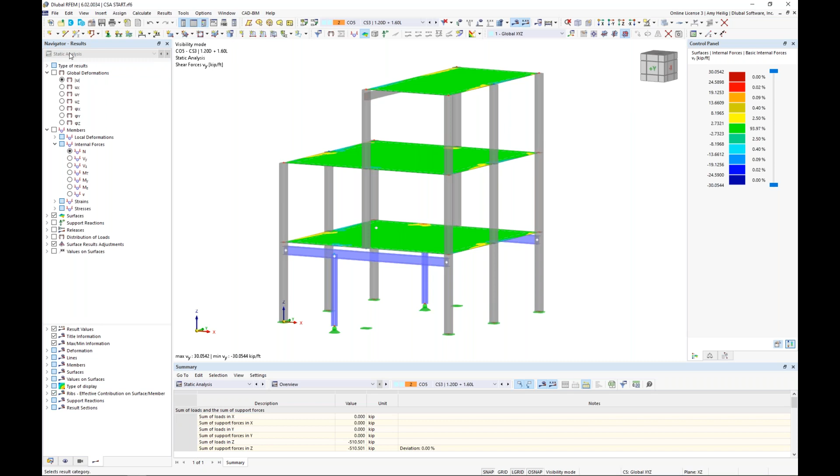Once the program is done solving for all of these load combinations, we're now presented with the static analysis results. So no design yet, just purely the analysis portion within RFEM itself. And we can see our results available to us in our navigator over here. For example, we're looking at load combination number 5, and we can view the global deformations of the structure.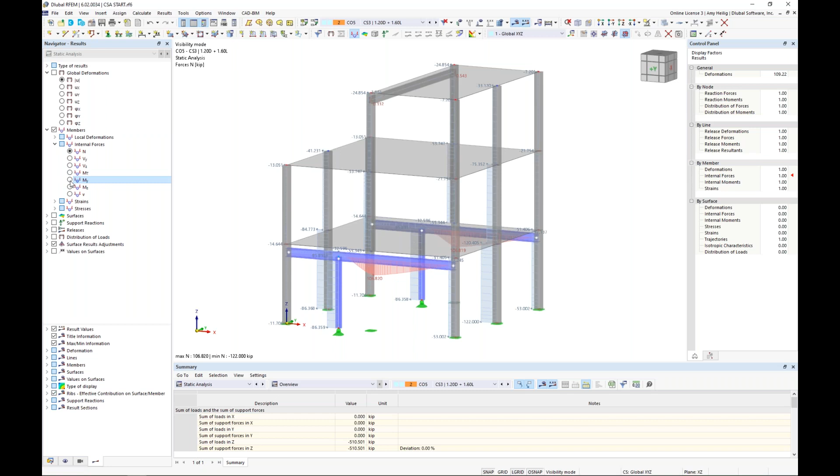We also can take a look at the member internal forces, for example the axial forces. Maybe we want to take a look at the bending moments here for our beam elements. So all of this is visible based on the various load combinations, again that have factored in these stages. And of course, we also have our surface results where we can view the bending forces, MX, MY. We can view shear forces. This is obviously for my initial structure, stage number 1.

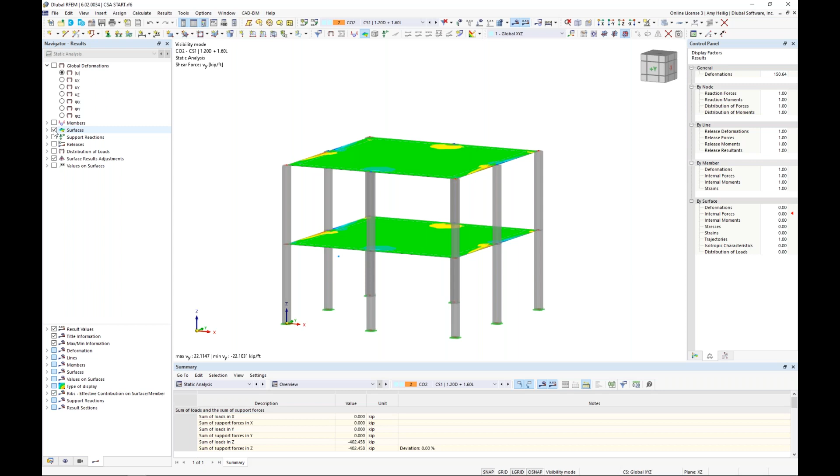That is essentially the analysis with these construction stages, but I would like to show you how to incorporate also the design with these stages as well. So we can activate the design add-ons by selecting it within my drop-down box here down in the table. And we see here concrete design, and this is available because we activated the concrete design add-on within the base data at the beginning of the example.

And you remember I stressed how important those design situations are because they are absolutely needed here when we move on to the design portion of our model. So we have here our first LRFD design situation. We're going to select here from our drop-down to relate this to the strength design for the ACI standard. Then I have my unfactored load combinations where I'm going to relate this to the serviceability design.

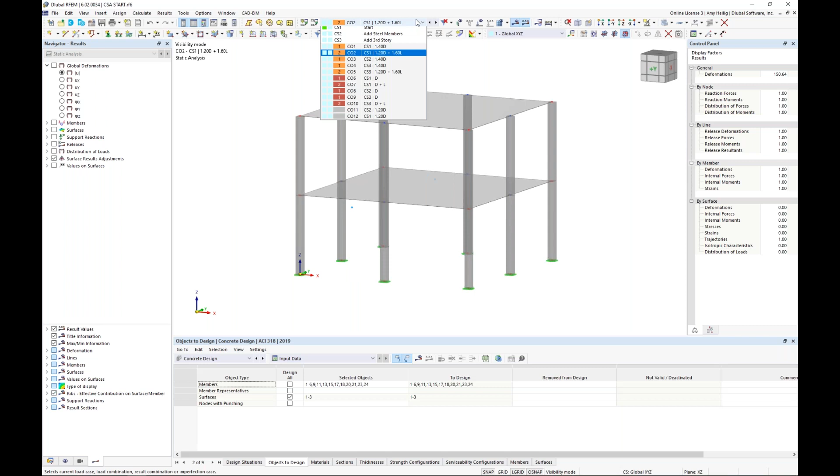Under my second tab, I would select all of the objects that I would like to design, and I can select all of my concrete members, except for, remember, I'm not going to design this rib element here, and maybe I want to design all 3 surfaces. So that's what's currently selected here. So I'm really ready to run my design as well, and I can choose this option here, show results.

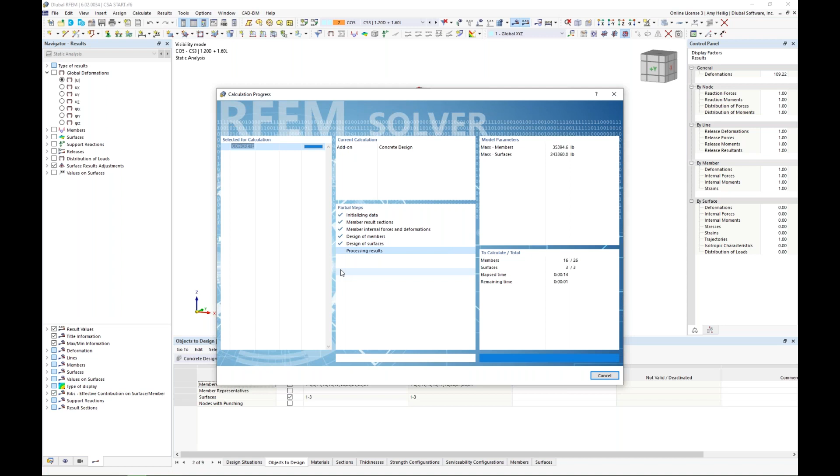Now I already have my internal forces from all of the load combinations. They're simply brought into this add-on, and the equations from the ACI are applied. We consider the reinforcement to ultimately get our design ratio and required reinforcement for each one of these surfaces as well as our members. Once we are done with the calculation, we can view the design ratios on the surface, currently in table format.

Notice at the bottom, we can view the design ratios by the construction stage. So here's construction stage number 1. We can view each one of these checks for construction stage number 1. Notice we have a pretty high check here for our shear design, so we probably would want to address the shear design for this particular slab right around where this column element is framing in, but everything else for the most part looks okay.

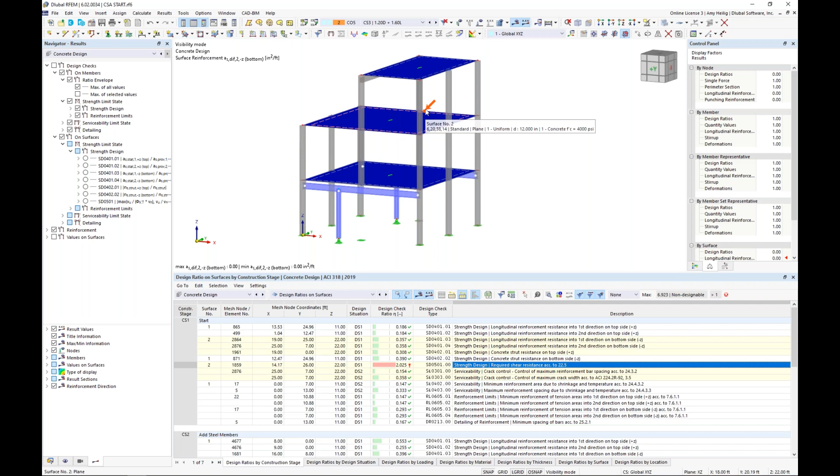We can also view the design ratios by the surface itself. You can see one of the columns here, which shows which construction stage this is applicable for, as well as the load combination.

As we select any one of these options in table format, what's new within RFEM 6 is visiting the design check details. The design check details give us all of our variables in table format, and you can see on the right-hand side all of our equations. This one is rather complex, but if we scroll down to the bottom, we'll show how this design ratio is calculated step by step.

We're going to give you the code references in the right-hand column. We also have additional code references in table format, trying to be as transparent as possible where all of these calculations and code checks are coming from.

Notice here we have a dropdown where, if we're looking at this particular location, mesh node number 2154, we can also select any one of the other construction stages, and the program will automatically update our calculations to show for that particular construction stage.

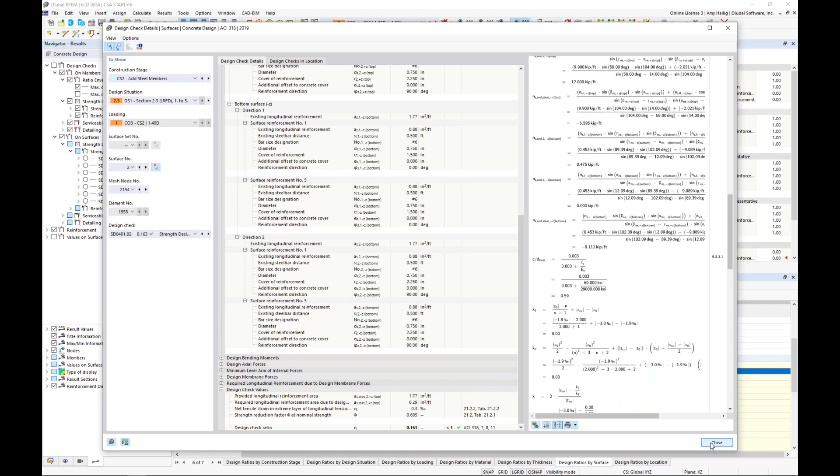Same concept here for our design ratios on our members as well. We can see design ratios by the construction stage. As we scroll through each one, we see all of the checks relevant to the ACI. We can also view, similar to the surfaces, the design check details. This one's a little more simplistic for our member design, but the code equations and code references are given, and new within RFEM 6 is the addition of interaction diagrams for these concrete columns.

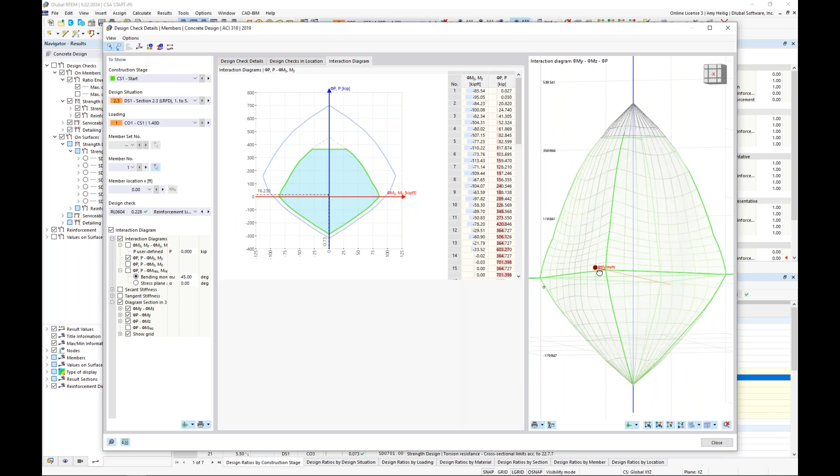So now we see the 3D interaction diagram here. We can see exactly where we fall for this particular member.

Now we can export this information to Microsoft Excel, so table format is nice. We also can view all of this information graphically over here on the left. So we see now we're no longer looking at the static analysis, but we're looking at the concrete design.

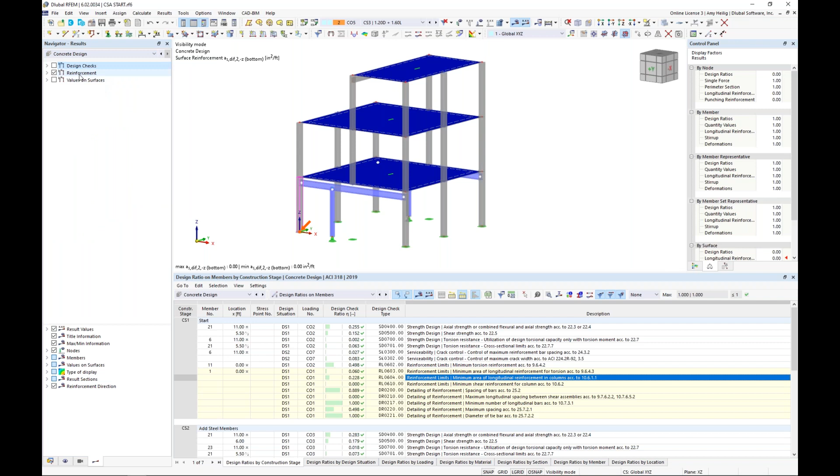If we right click here to collapse these folders, we can turn on the design check of our members, for example. We can take a look at the strength limit states and the various checks shown here to graphically compare this to our color panel, to see exactly what's happening for these members graphically as well.

So that will sum up just a quick introduction to incorporating the construction stages for the concrete design add-on, but to briefly touch on the steel design as well.

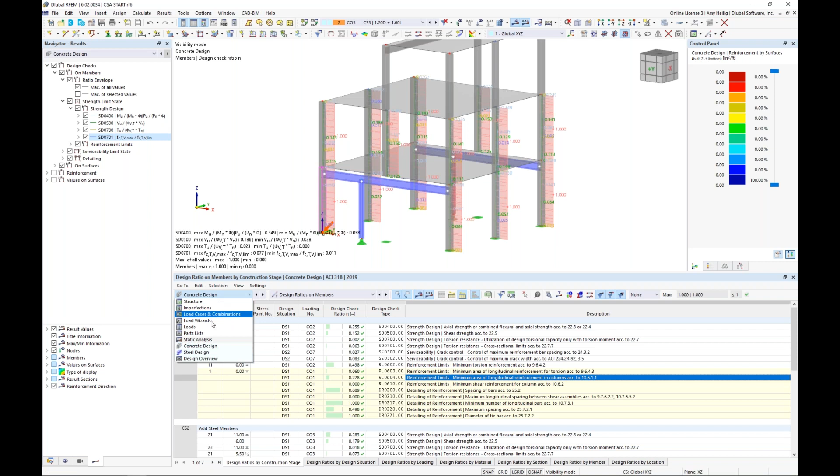Very similar workflow. You'll notice under the steel design, we once again have our two design situations here, LRFD and ASD, and we will relate this to the strength limit state for our factored load combinations and serviceability limit state for our deflection checks for the ASD design situation.

Under the objects to design, this is where I could graphically select all four of these steel members. I click OK, and I can run the quick calculation here. Again, I already have the internal forces; it just brings them into the steel design and applies the AISC equations to ultimately get the design ratios.

So we can view the design ratios by the construction stage itself, and we see construction stage 1. We shouldn't have much available there because those steel members didn't exist yet, but for construction stage 2 and 3, we see all of the relevant checks shown here.

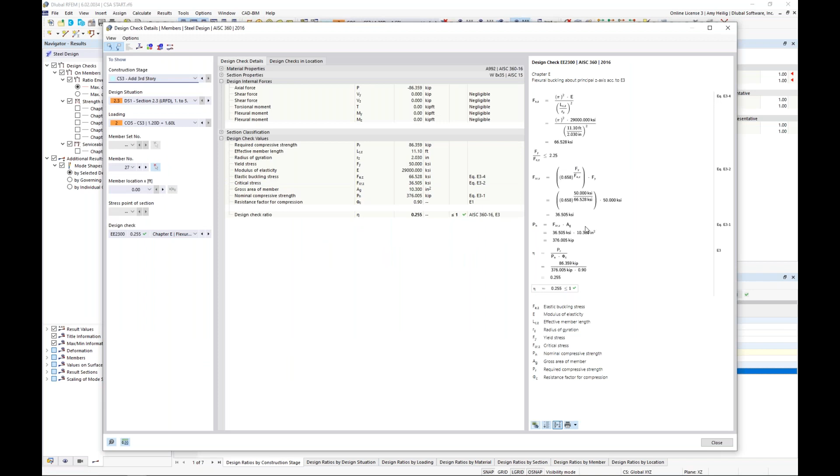Now you can also utilize the filter options, and if I don't want to see every single chapter for each one of these members or construction stages, we can just filter to the max option. So now we see what's actually controlling for each construction stage. Very similar to concrete design, we can visit our design check details, and we see the code equations and code references directly from the AISC 360, along with all of our information presented in table format.

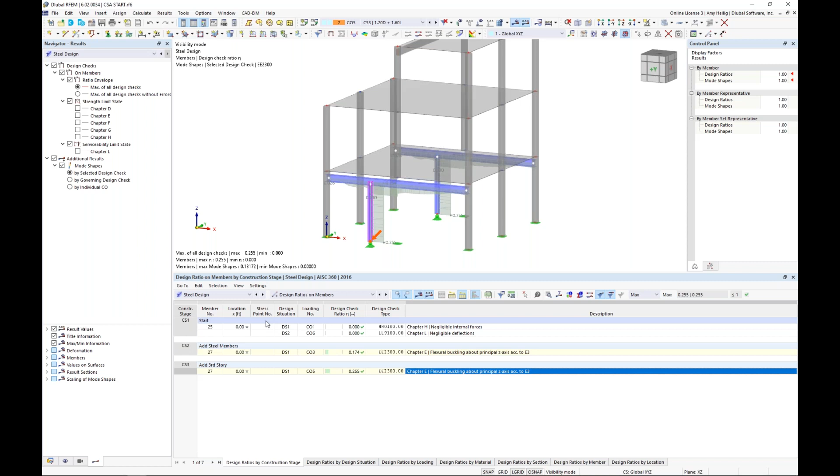This sums up today's example, where we modeled the entire structure. We created construction stages not only for the model, deactivating and activating elements, but also for loading considerations, factoring the construction stages into load combinations and design situations. Finally, we saw how to incorporate those stages into additional design add-ons—and keep in mind, this isn't specific to concrete and steel design; we could also use it with our form finding add-on, aluminum design, timber design, and so on. We'll go ahead and revisit the PowerPoint.

I wanted to touch on a few future developments we can expect with construction stages analysis. We recently added line, surface, and nodal releases in RFEM 6—we already had them in RFEM 5, it just took a while to bring them into the new version—and these will eventually be incorporated into the construction stages analysis consideration, along with all the activation and deactivation options. I also mentioned stage analysis via load cases and results combinations utilizing linear superposition. This will be extremely helpful for large models with many load combinations, rather than factoring construction stages into each one—we can superimpose the results on the final structure to consider the stages, which will greatly improve performance.

We'll also be adding what we call phased massive cross sections and surface thicknesses, so we can activate element parts step by step. For example, if we'd like to increase the dimensions of a concrete column, we'll be able to account for that phased activation within the construction stages add-on. And finally, as I mentioned before, it's a longer-term development, but we do plan to eventually link the time-dependent analysis add-on for considerations such as creep and shrinkage within construction stages as well.